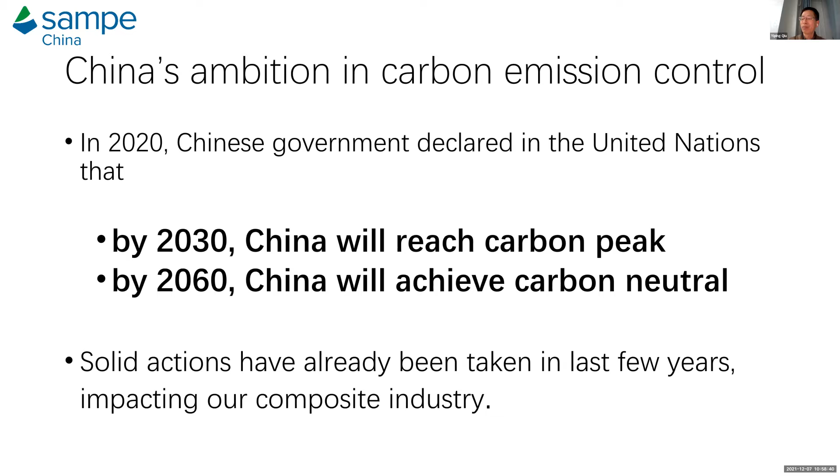What I'm going to talk about today is actually everything around energy. So try to cut down energy consumption or try to use alternative energy. So we actually have to make a lot of effort, in which carbon fiber and carbon fiber composite materials will be widely used. And in fact, we have a huge market here.

The first one I want to talk about is the wind turbine. As discussed in the previous presentation, the wind turbine industry is growing very fast in China. We surpassed the United States in 2010 for the first time, ranking #1 in the world. And ever since then, we have been the #1 in the world. And we have a very large capacity.

We have 4,000 wind power plants, meaning fields of wind power generators together to form a plant. And also we have 120,000 wind power generators with a capacity of 200 million kilowatts. So it's increasing very fast. I'm not going to read through all of these, but accumulatively, we have more than 2 million.

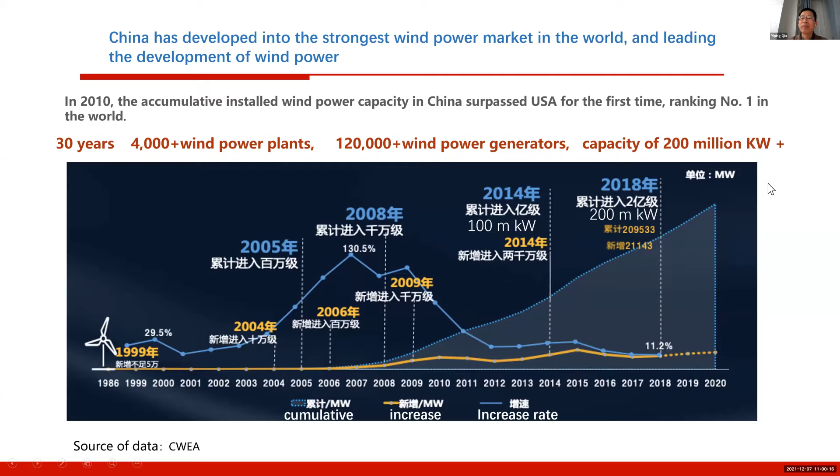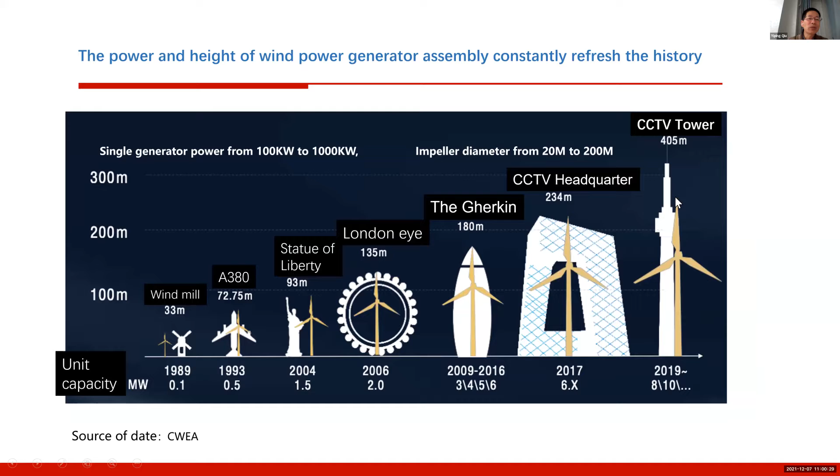And also the wind turbine is becoming ever larger, and it reached 300 meters height. So the wind turbine blade is very large. In that case, we see that carbon fiber glass mixture is being used to support these very large blades, also discussed in the previous presentation. And so this is why carbon fiber is more and more used in the wind power generator.

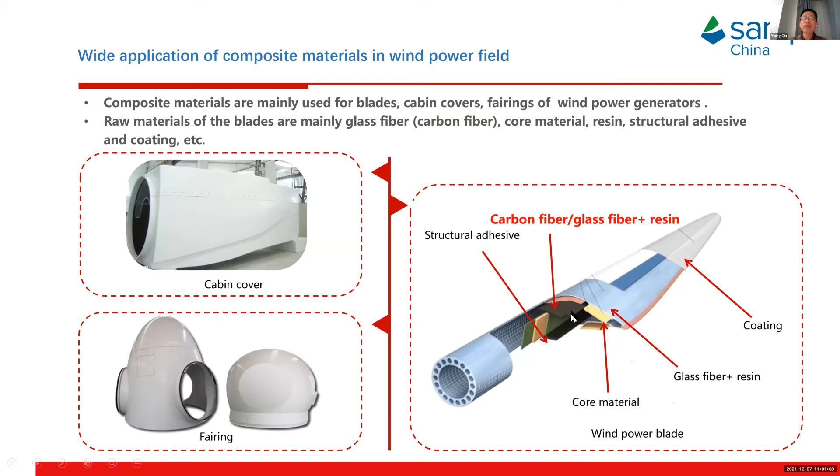The blades are becoming larger and larger to make it more efficient. In that case, carbon fiber will have to be used in an ever increasing amount. And if you look at the trend, it's predicted in 2028 in North America it will be almost 100% carbon fiber usage in wind turbine blades. And in Asian Pacific nations, it will reach 92%.

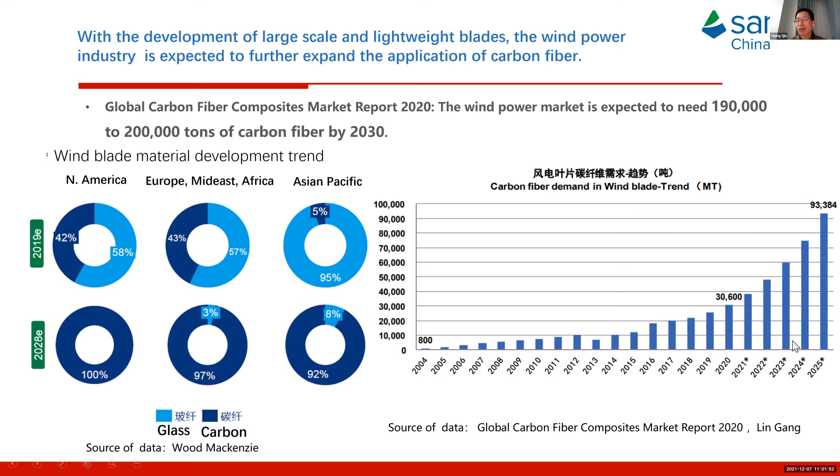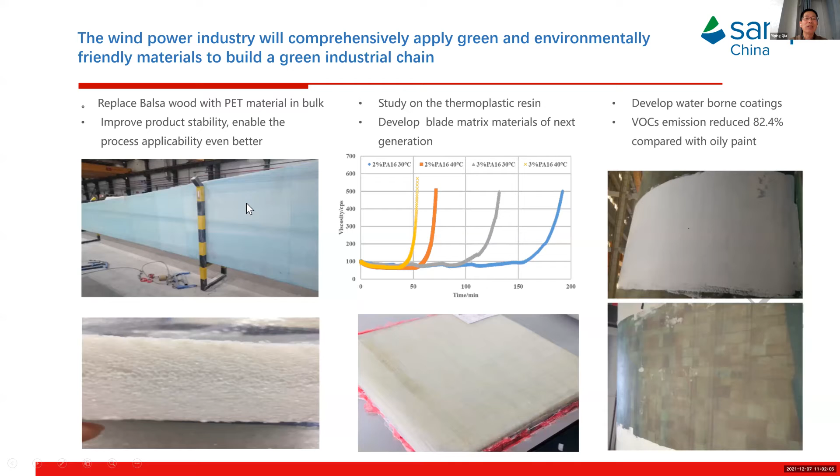So it's very high. And if you look at the carbon fiber demand in wind turbine blades, it will reach 93,000 metric tons in 2025. It's a lot of capacity requirement. And of course, in the wind turbine industry, we also use some recycled fibers and thermoplastic matrix to make it recyclable, but it has nothing to do with carbon fiber, of course.

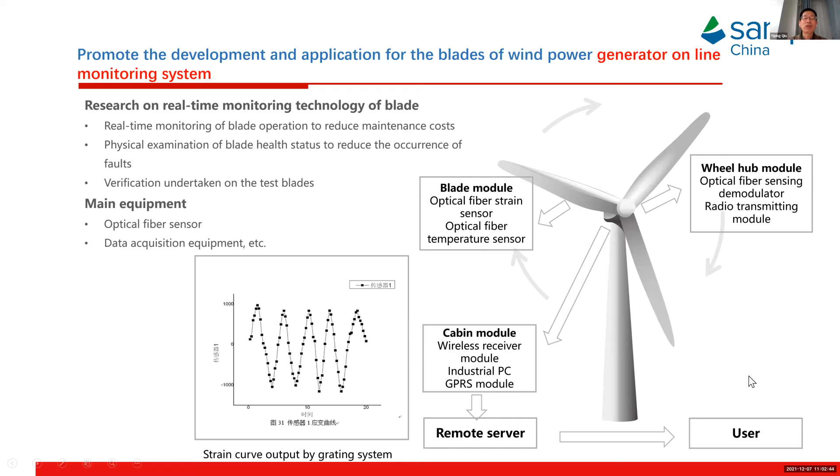And the other thing is that with this ever increasing size of wind turbine, we found that we will have to use an online monitoring system for this generator. For example, we will have a blade module with sensors, a wheel hub module and the cabin module, all with sensors wired up to a remote server and finally to the user. So that's actually a trend. So much about the wind turbine.

And now let's talk about hydrogen energy. That's also been discussed in the previous presentation, that there will be a huge increase in hydrogen energy. So if we look at the output value, like in 2019, this is actually in China. Okay, I'm not only talking about China. And you can see an increase. Currently, 300 billion Chinese yuan.

6 Chinese yuan is equal to $1 US. So basically, if you divide it by 6, it'll be like 50 billion US dollars. And so it's going to be increased to 12,000 billion, or 12 trillion actually, Chinese yuan, which is about 2 trillion US dollars in the long term. That's the output value for the hydrogen industry. So it's a very, very large industry.

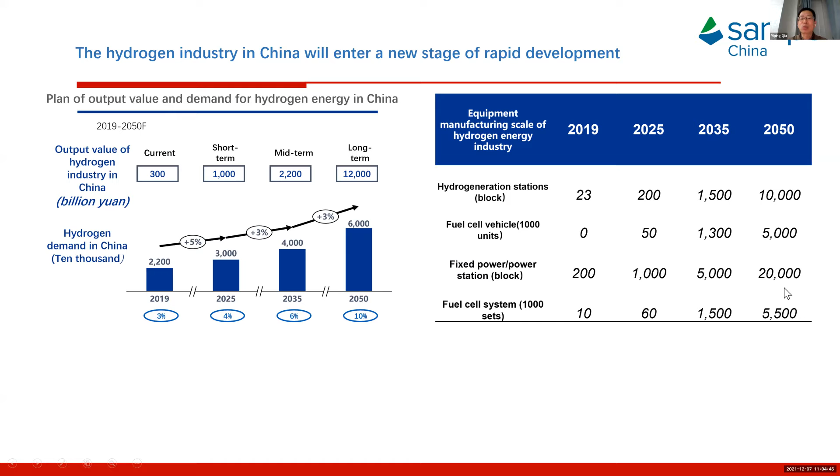And so we're going to have a lot of hydrogen generation stations and also fuel cell vehicles, fixed power stations and fuel cell systems. So you can see the increase, 23 versus 10,000 in 2050. We have almost no fuel cell vehicles running in the street, but we're going to have 5 million predicted in 2050. So it requires a lot of hydrogen high pressure tanks and also power stations. It's not carried by vehicles, but it's used in industry and also fuel cell systems. These are also used for the industry.

So if you look at the actual distribution, on the transportation side, we're going to have 7% of the total commercial vehicles sold in 2030 using fuel cells, and 37%, which is about 1/3 of the commercial vehicles, will be fuel cell vehicles. And fuel cell passenger vehicles will be 3% by 2030 and 14% by 2050. So it's quite a lot, actually.

Considering that China has 1.4 billion people, and probably every 2 persons will have 1 vehicle, then it will be a lot of passenger vehicles, actually. And in overall energy consumption for transportation, hydrogen energy is expected to account for 19% of the total energy consumption in 2050, of which 70% is freight transportation.

Now, the other very important thing is industry applications. For example, for the steel industry, we talk about steel going out, but we're still using a lot of steel. Hydrogen energy used for the steel industry is expected to be 34% of the total energy consumption by 2050, reaching 76 million tons of standard coal.

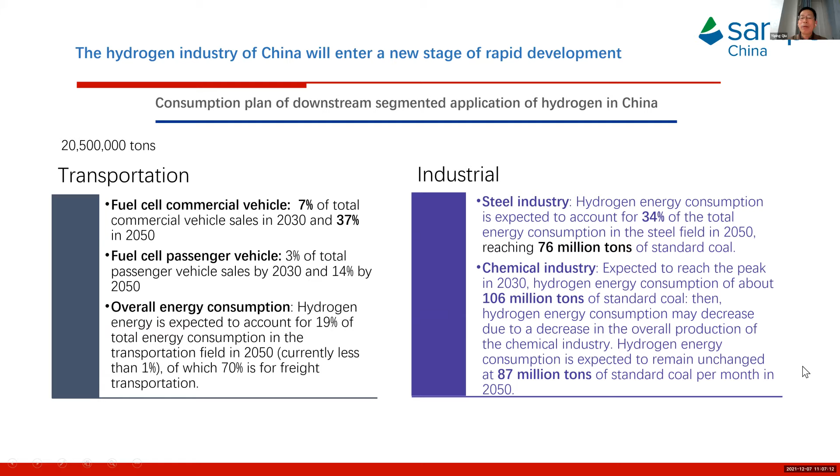And for the chemical industry, it's expected to reach the peak in 2030, with hydrogen energy consumption of 106 million tons of standard coal. Then the hydrogen energy consumption may decrease due to a decrease in the overall production of the chemical industry. But hydrogen energy consumption is expected to remain unchanged at 87 million tons of standard coal in 2050. Now, why is that important?

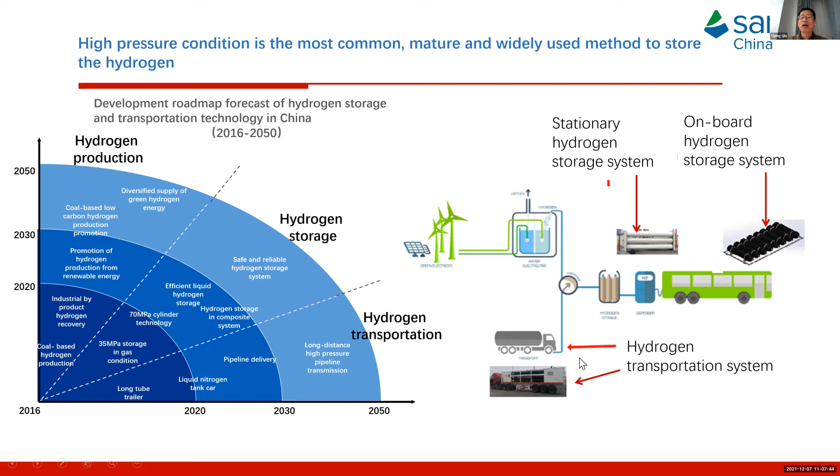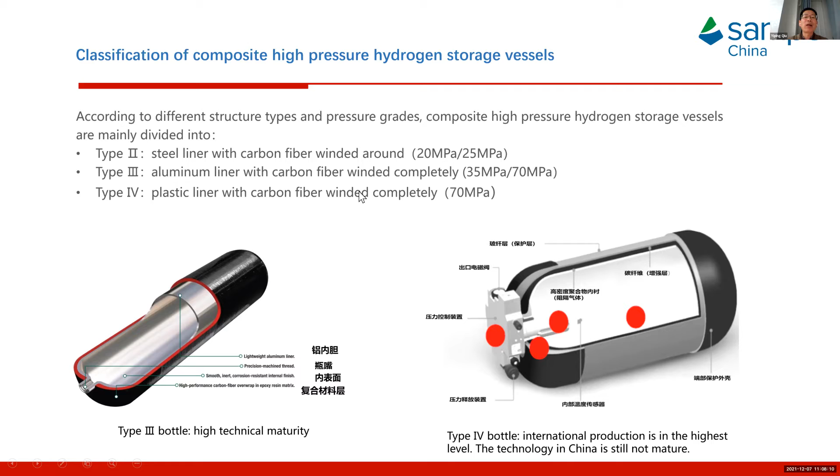Because in hydrogen production, hydrogen storage, and hydrogen transportation, we need high pressure vessels. It's actually a lot. For example, you have stationary hydrogen storage systems, you have high pressure vessels carried on board vehicles, and obviously hydrogen transportation systems require a lot of high pressure vessels. What do these look like? These are carbon fiber wound pressure vessels, and currently you have type 2, type 3, and type 4 high pressure vessels, all wound with carbon fiber. So it requires a lot of carbon fiber for these pressure vessels.

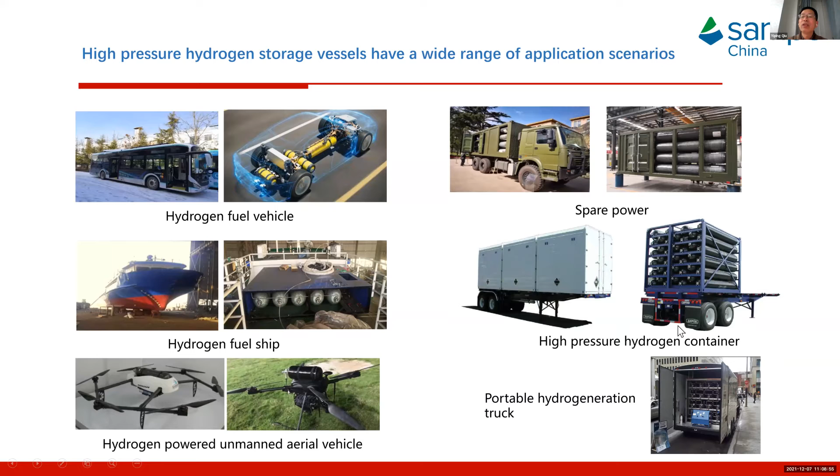And these are applications for high pressure hydrogen storage. Obviously you can see hydrogen fuel cell vehicles, and also spare power. It requires hydrogen, and the hydrogen fuel cell ship is going to be more and more popular for environmental purposes. And hydrogen-powered unmanned aerial vehicles, and also high pressure hydrogen containers and portable hydrogen generation trucks. All these will require high pressure hydrogen storage vessels.

This is actually a slide from China National Building Materials Group for hydrogen storage and transportation products. They produce high pressure vessels for fuel cell vehicles, for fuel cell unmanned aerial vehicles, and for hydrogen transportation. These are the long steel tube containers and the hydrogen storage containers for hydrogen stations. So basically, just like gas stations, we also have hydrogen stations for vehicles, especially passenger cars. You need to replace the gas stations with hydrogen generation stations.

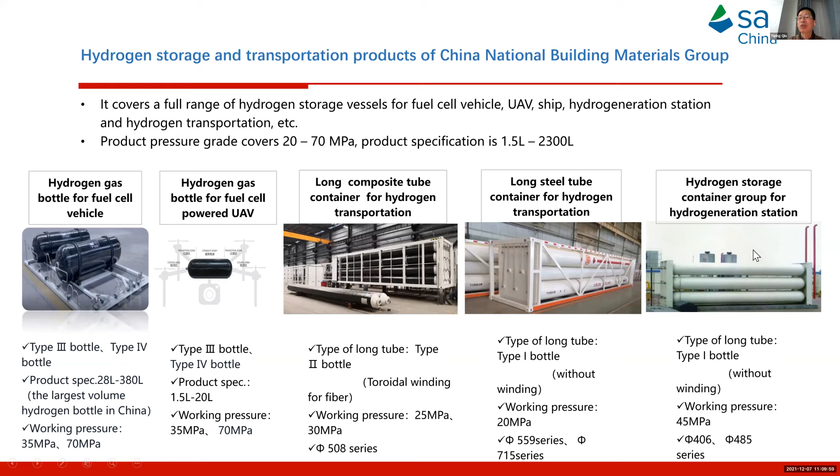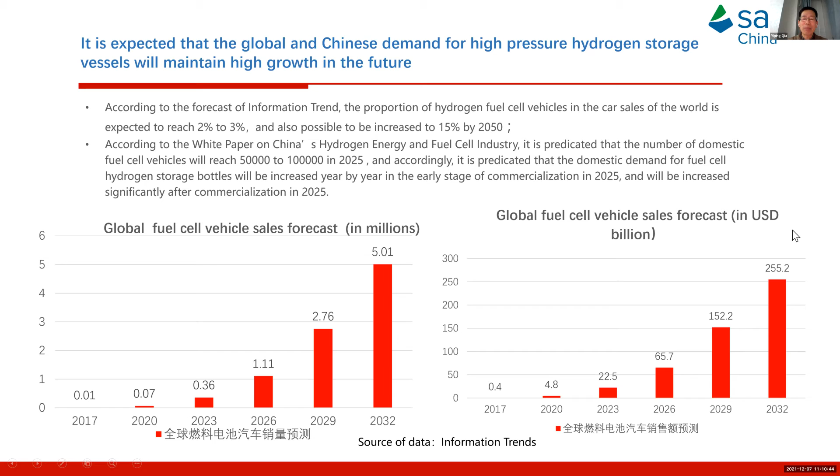So it's expected that the global and Chinese market is going to grow very fast, and global fuel cell vehicle sales are forecast to reach 5 million fuel cell vehicles in 2032, which is not very far away, and global fuel cell sales will reach 250 billion US dollars, in which obviously the high pressure vessel made out of carbon fiber will be a very important part.

So, the demand for carbon fiber and composite material is large. According to the Global Carbon Fiber Composite Materials Market Report 2020, hydrogen and CNG tank bottles are expected to require 180,000 tons of carbon fiber by 2030. So it seems to be very optimistic in that sense.

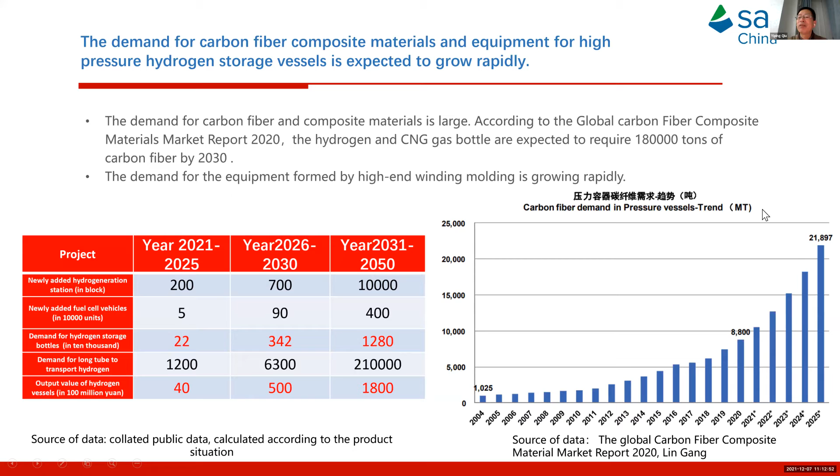So if you look at the carbon fiber demand in, let's see, 2020, it is 8,800 metric tons, and it will reach 21,897 tons of carbon fiber demand.

So the next one is actually EV, or what we call in China new energy vehicles. In fact, if you look at the new energy vehicle ownership statistics, it actually increased very fast. Sorry, it's a typo here. It should be 2015. Anyway, it increased from 2015, 42 times 10K, so it should be 420,000, to about 5 million in new energy vehicle ownership.

Now, one of the reasons for the rapid growth is that the Chinese government is trying to control the pollution in big cities like Shanghai and Beijing. So they started to limit the registration plates distributed to new vehicles. In Shanghai, for example, buying a car is very easy, but the registration plate is not easy to obtain. But if you buy a new energy vehicle, an electric powered vehicle, then you are able to get the registration plate immediately.

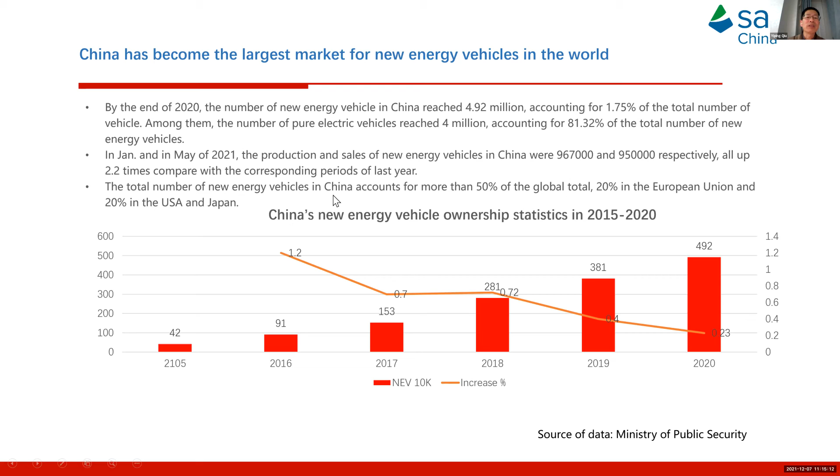So nowadays in Shanghai, for example, you can see very many of these electric powered passenger cars running in the street. All the public buses in Shanghai are actually electric powered vehicles. And in big and medium sized cities, all these vehicles are actually electric powered. Why that is important is because we have to worry about the weight of the automobiles.

Now, the previous speaker said that if you want to reduce the weight of these cars, you have to replace steel, aluminum, and even glass fiber with carbon fiber. That's the only way you can reduce the weight. And by doing so, you can increase the trip that can be made by one battery pack. For example, if the total weight is close to 1 ton, then you can travel 275 kilometers. But if it is increased by 50%, you can only travel 186 kilometers.

Now that's one of the problems people complain about with electric powered cars, that they cannot run far enough. For family use it's okay, but for taxi and Uber-like cars it becomes a problem, because they cannot make money if they have to wait like 2 hours for recharging. So vehicle weight is always a problem. This is why in China it becomes very, very popular.

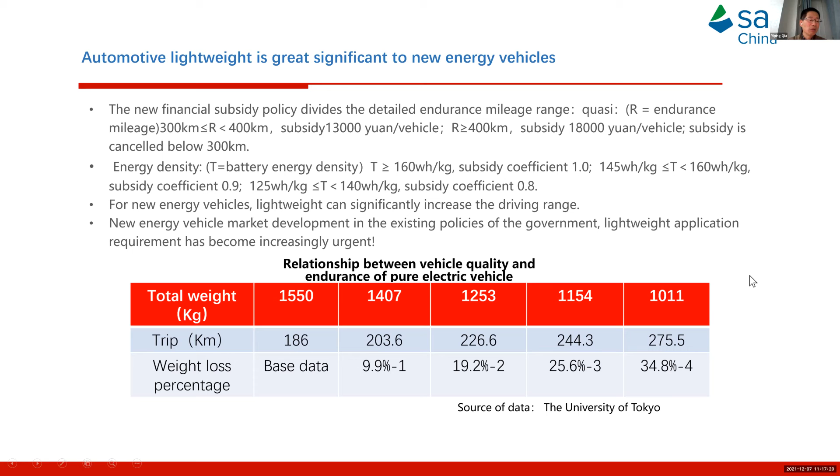And I think the prediction for electric powered vehicles is probably conservative, because I think the growth will be tremendously high. In fact, you see, for weight reduction, fuel saving and carbon emission, carbon composites are always the largest. So this is why carbon fibers are going to be used more and more widely. Obviously, you have the problem of cost, but I would say the cost of carbon fiber will decrease continuously, but may not be as much as people would like.

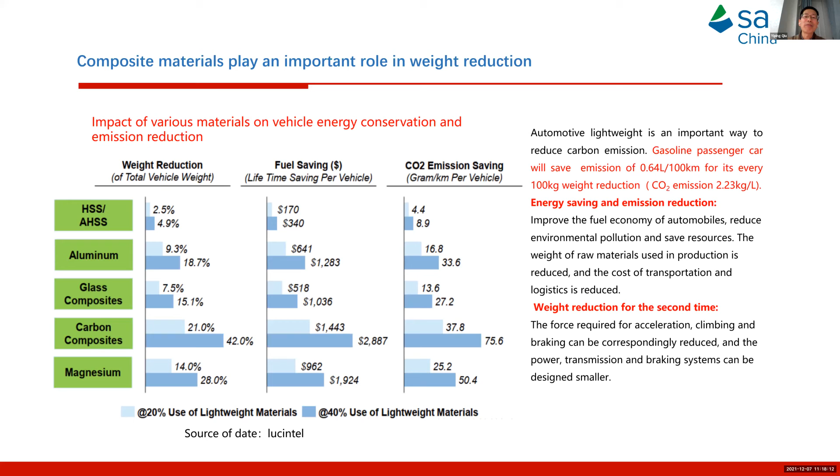But I think it will be decreased over time, and think about the benefits you get from it. And I think carbon fiber is really the best choice. Okay, so these are the composite material parts, and in fact, Chinese automobile manufacturers are actually making a lot of efforts to try to reduce the weight.

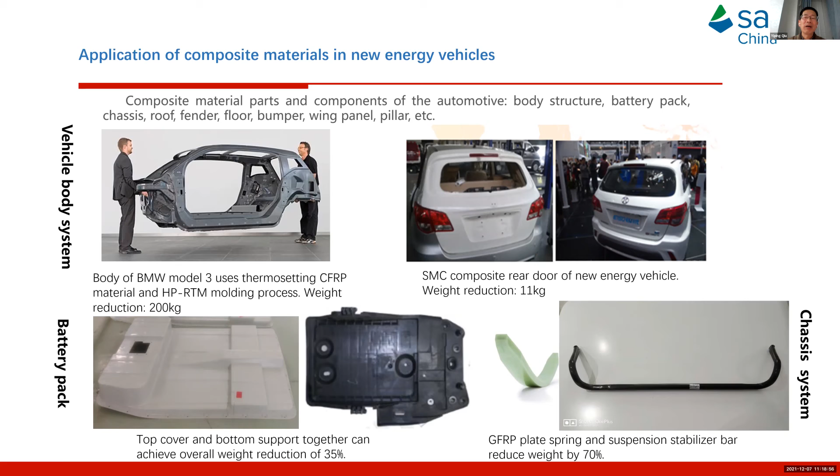Now this is a BMW. I think some of the Chinese car manufacturers are working very hard to try to develop similar products, but it's not easy, of course. I'd say that because of the pressure from the market, they're going to quickly develop technologies required for this kind of vehicle.

And so if you look at the carbon fiber demand increase, the global increase will be like, by 2024 it will reach 18,000 tons of carbon fiber demand, and this I think is probably going to be even more, because the demand for carbon fiber for automobiles and rail transportation in 2030 is

conservatively estimated at 90,000 to 100,000 tons, or 1 million tons. I'm sorry. So it's 100,000 tons. I'm sorry. So you never know how much carbon fiber demand is going to be reached in future.

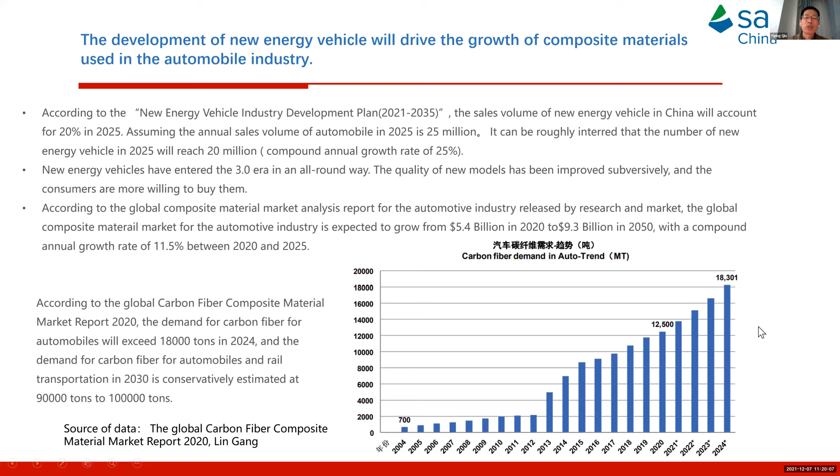And the last one I want to talk about is actually the photovoltaic industry. You'll be surprised, since this seems to be related to silicon, but since alternative energy is actually in very high demand, solar energy seems to be a very important part of it. So China has the largest PV market, which is currently #1 in the world.

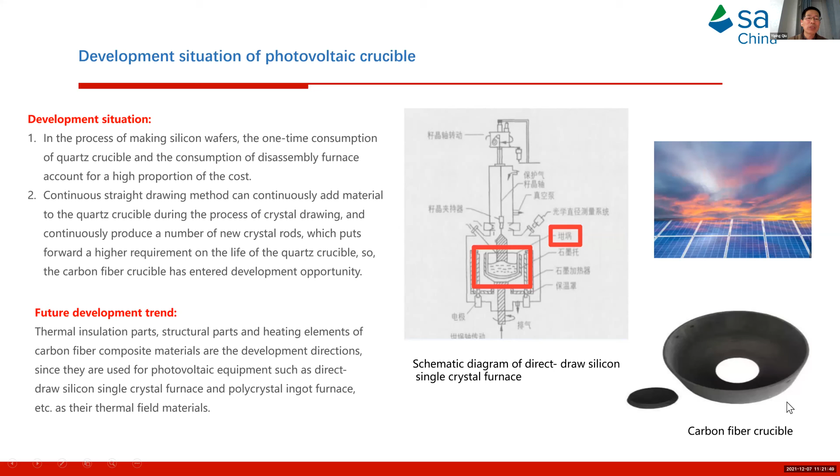Now the crucible used to be made out of quartz, which is kind of a silicon. But the trouble is that the lifetime for these quartz crucibles is not very long. So if we replace it with a carbon crucible, then the lifetime can be extended more, and it actually costs less in that sense. So this is actually a very large market.

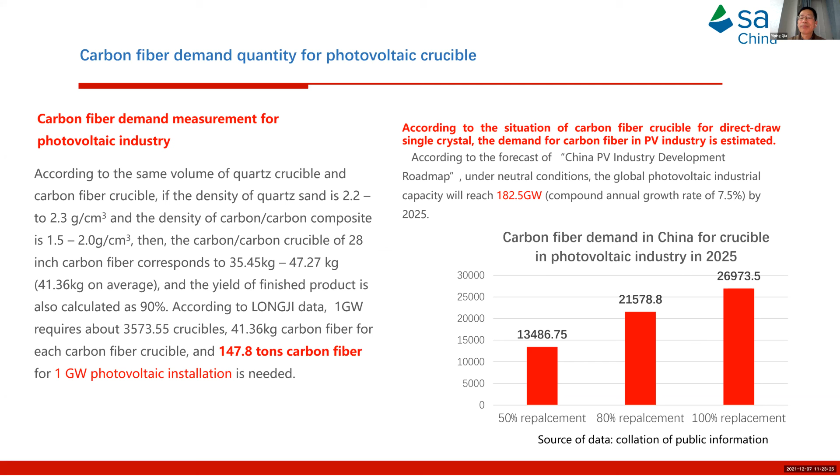Because one gigawatt photovoltaic installation requires 147 tons of carbon fiber if you replace the crucible. So it's a very large market right there. And I don't know what the end is, but because of the lifetime and the expenses of the quartz crucible, carbon fiber carbon composite replacement is a very good alternative and economically feasible. So that's the market that we need to pay attention to.

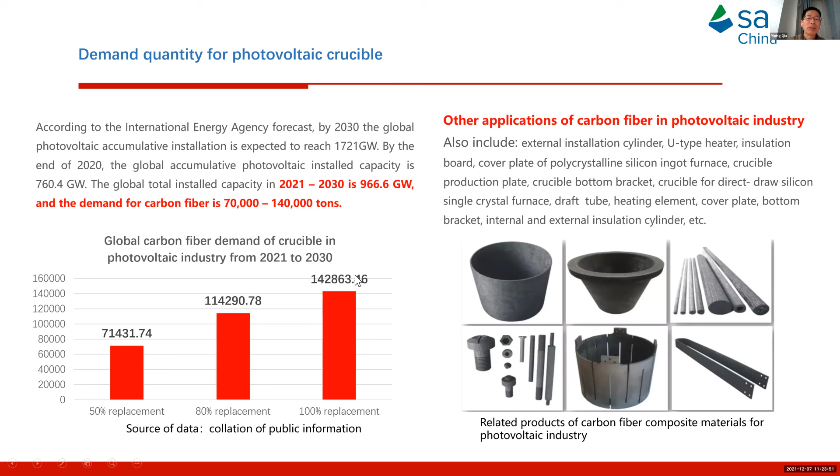And this is actually the global carbon fiber demand for crucibles in the photovoltaic industry from 2021 to 2030. And if you look at this, this is actually 142 thousand tons of carbon fiber demand for crucibles.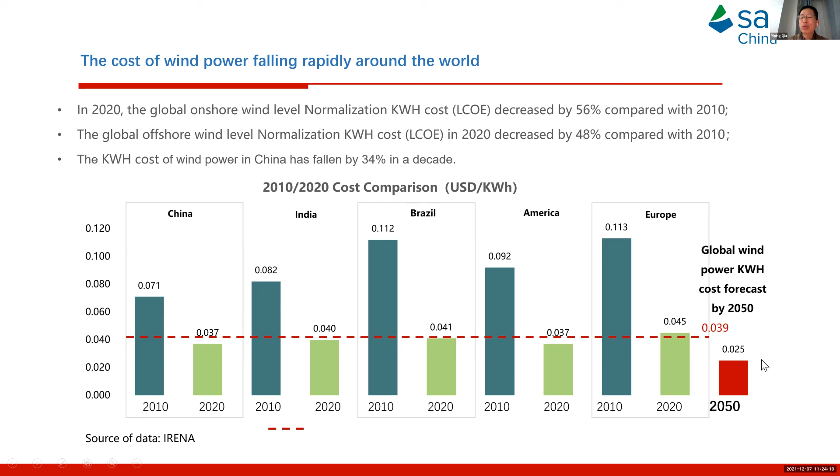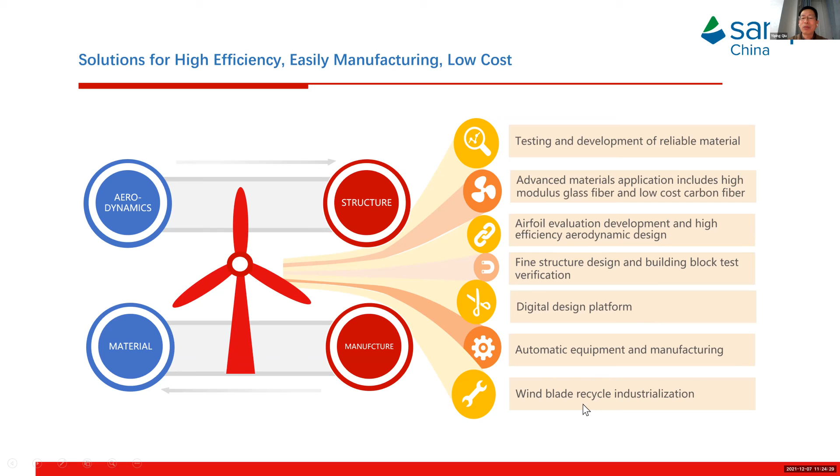Okay, so I'll be very quickly going through the challenges. First one is the cost of wind power, which needs to be further decreased. Second is that we need to have systematic development for testing, advanced materials application, and so on. So I'm not going to go through everything. And finally, recycling. And for high pressure vessels, we still have a lot of challenges, technologies, inspection, and so on.

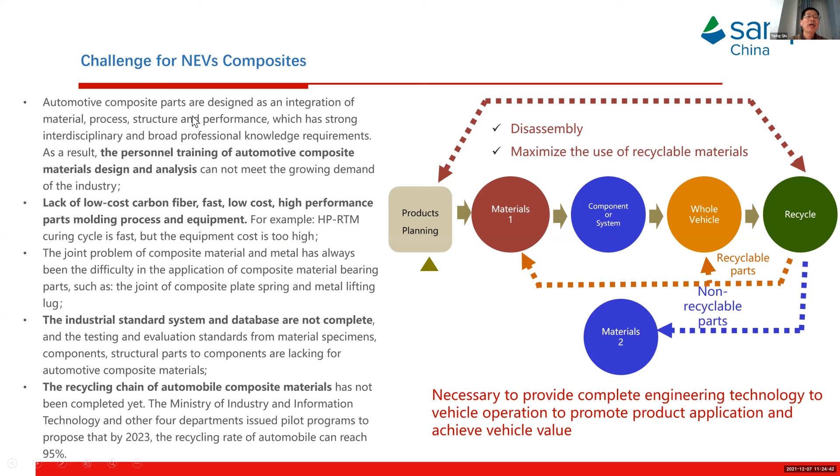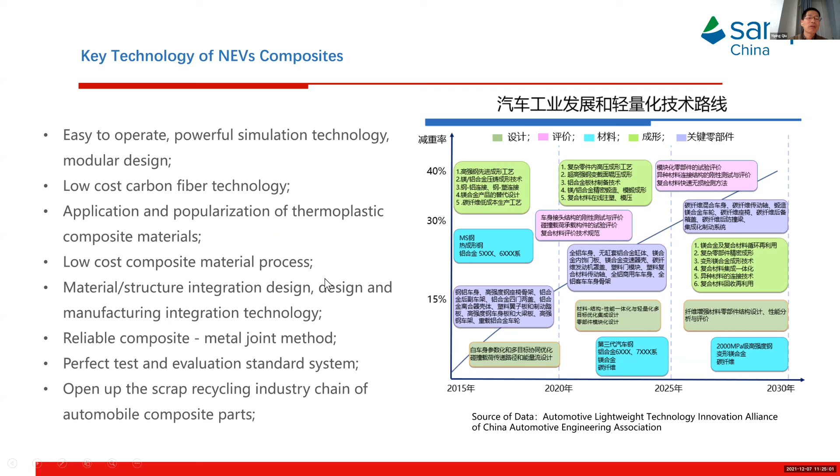And for new energy vehicles, we also have a lot of challenges. For example, it has to be easy to operate, a powerful simulation system, low cost carbon fiber, the application and popularization of thermoplastics, low cost composite material processing, reliability, and finally recycling. So these are the things that Chinese industry is facing, and I think we still have a very long way to go, but the future is bright.